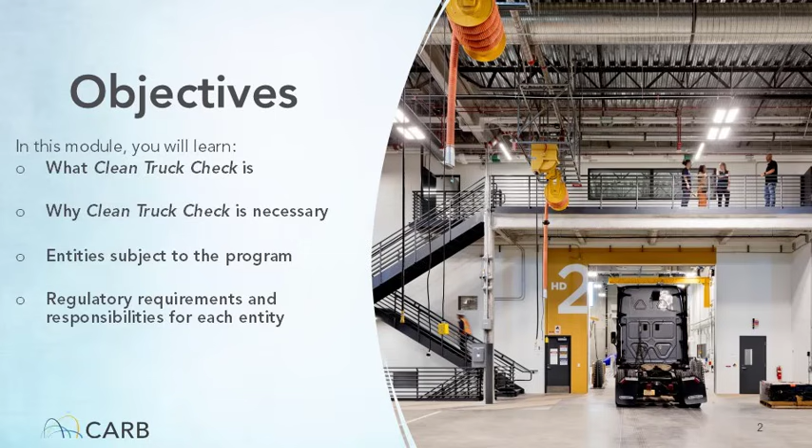Clean Truck Check started in January of 2023. It requires almost all diesel and alternative fuel vehicles with a gross vehicle weight rating of more than 14,000 pounds to pay an annual compliance fee and submit passing emissions compliance tests to legally operate on California's roads and highways. This includes applicable vehicles registered outside of California and outside of the United States.

Clean Truck Check is similar to California's Smog Check program, administered by California's Bureau of Automotive Repair for light-duty passenger vehicles and gasoline heavy-duty vehicles.

Clean Truck Check's emission system inspections and testing ensure that a vehicle's emissions control systems are maintained and functioning. To minimize excess emissions, vehicles with emissions control malfunctions are required to be repaired and submit a passing emissions compliance test by a specified deadline.

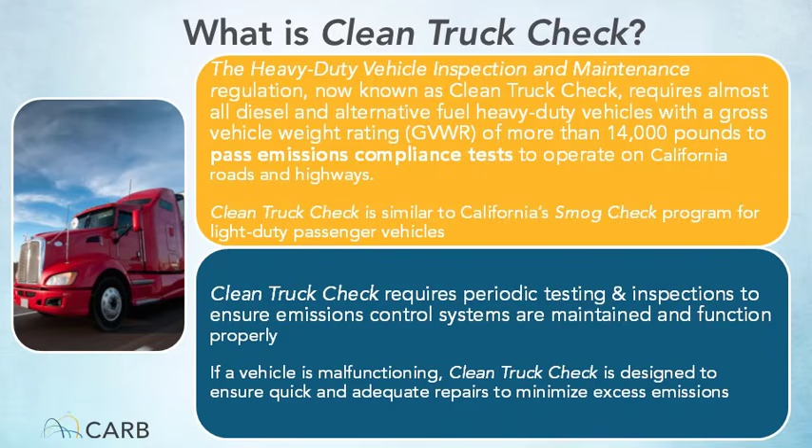Why do we need a Clean Truck Check program? Because heavy-duty diesel vehicles represent over half of the harmful emissions from mobile sources in California. In fact, in 2020, heavy-duty diesel vehicles were responsible for over half of the statewide on-road mobile source emissions of oxides of nitrogen, referred to as NOx, and particulate matter, referred to as PM.

Heavy-duty vehicles with malfunctioning emissions control components can emit substantially higher emissions than properly functioning vehicles. For example, recent test data show that vehicles with damaged diesel particulate filters, called DPFs, can emit PM at levels more than 50 times that of a vehicle with a properly functioning DPF. As we'll discuss later, diesel PM is toxic and harmful to health.

To meet near-term federal health-based air quality standards and reduce health risks for individuals throughout the state, we must act now to reduce emissions from all sources, particularly heavy-duty trucks. Even with all the progress California has made in improving air quality, it still has the worst air quality in the nation, which is responsible for thousands of premature deaths each year.

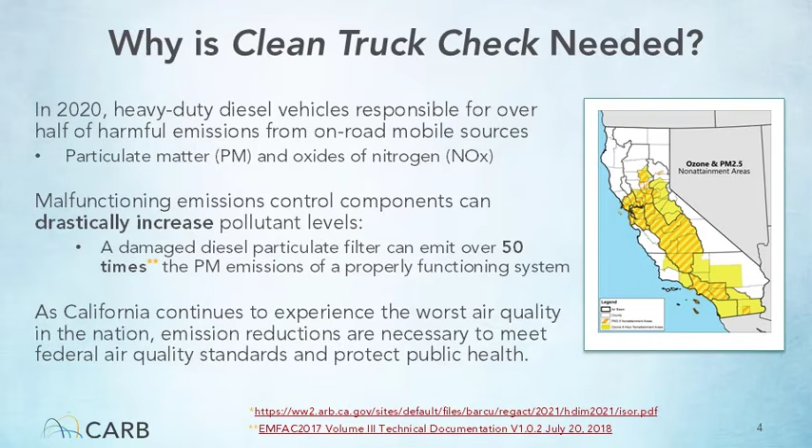As we've mentioned before, NOx is one of the harmful pollutants given off during the operation of heavy-duty combustion vehicles. NOx is a group of highly reactive gases formed during engine combustion at high temperatures and is a critical ingredient in the formation of ground-level ozone.

Once formed, ground-level ozone can lead to many health-related ailments, including respiratory issues such as decreased lung function, increased asthma attacks and allergen responses, and increased hospital and emergency room visits. NOx is also a precursor to secondary particulate matter 2.5 formation and increases the risk for serious health conditions, as we'll present next.

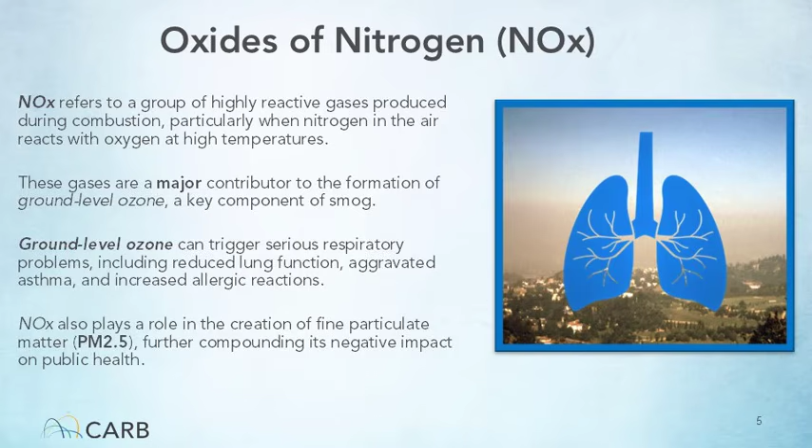Another harmful pollutant released during heavy-duty vehicle operation is diesel particulate matter, or PM. Diesel PM is made up of soot particles from the incomplete combustion of fuel during engine operations. Diesel PM includes a mixture of organic chemicals and metals.

A major component of diesel PM includes smaller particles, which we refer to as PM 2.5. PM 2.5 consists of fine particles with diameters of 2.5 micrometers and smaller, about 1/70th the diameter of a human hair. These tiny particles can move deep into the lungs during breathing and are responsible for serious and sometimes deadly health effects.

Exposure to diesel PM 2.5 can cause an increased risk of cancer, chronic heart disease, asthma, decreased lung function, increased hospitalizations, and premature death. Children, the elderly, and people suffering from chronic illnesses are the most vulnerable to the effects of PM 2.5 exposure.

Exposure studies indicate that about 70% of the cancer risk from airborne toxic contaminants in California is attributable to diesel exhaust. The large health risks associated with NOx and PM requires actions to reduce these pollutant levels during heavy-duty vehicle operation.

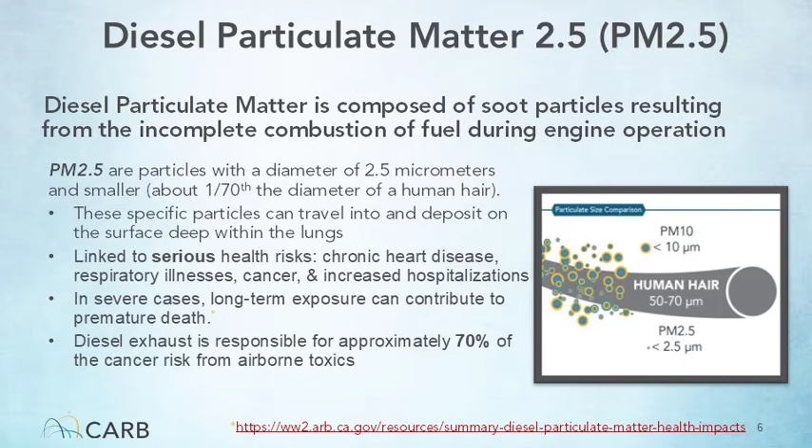With that background on the need for the Clean Truck Check program, we'll now move on to the regulated entities subject to the requirements of the program. The regulated entities include owners and drivers of almost all non-gasoline vehicles with a gross vehicle weight rating over 14,000 pounds that travel in California, and testers that perform clean truck emissions compliance testing on vehicles subject to the program. As a credentialed Clean Truck Check tester, you have a responsibility to accurately perform these tests using specific testing tools and submitting data to CARB in prescribed formats.

The modules in this training course are designed to inform you of your responsibilities as a credentialed Clean Truck Check tester, how to conduct emissions compliance tests, and how to submit test data to CARB.

Freight contractors and brokers that do business in California using vehicles and fleets that are subject to the Clean Truck Check program. Ports and rail yards in California that allow heavy-duty vehicles onto their properties. And finally, vendors of certified OBD testing devices that produce and sell the tools used to perform compliance testing using onboard diagnostics data downloaded from a vehicle's engine.

Moving forward in this training module, we'll now provide further details on the roles and responsibilities of vehicle owners and credentialed testers.

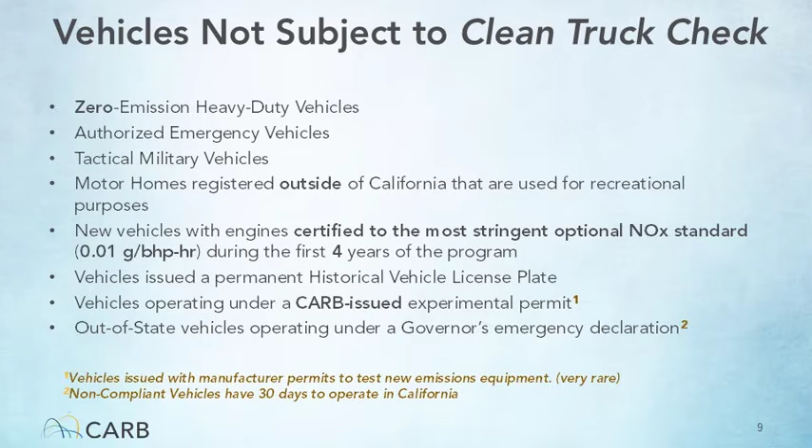In this next section, we will now go over the basic requirements for vehicle owners and drivers, including how these requirements are phased in over the lifetime of Clean Truck Check. In this training module, we will refer to the start date of these responsibilities as implementation phases.

We'll also provide an overview of other vehicle owner responsibilities, which include reporting vehicle and owner information to CARB and paying a per-vehicle compliance fee, and complying with the periodic testing requirements by specific deadlines and understanding the different compliance test methods. And finally, we'll summarize driver responsibilities during a roadside enforcement inspection.

Vehicle owners must ensure all their applicable vehicles operating in California comply if they are subject to Clean Truck Check's requirements. When the program first began in January 2023, remote emissions monitoring devices, or REMD, were deployed throughout California to monitor vehicles' emissions while driving. Vehicles that are detected as possible high emitters may receive a notice to submit to testing, and the vehicle will be required to submit a passing emissions compliance test within 30 days.

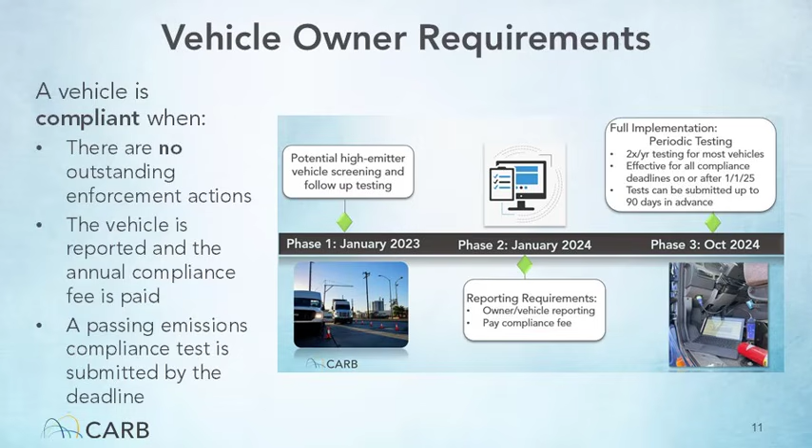Phase 2 requirements, with the initial deadline in January 2024, required vehicle owners to report their vehicles to CARB and pay an annual compliance fee for each vehicle. The third and final phase, beginning in October 2024, launched the periodic emissions compliance testing requirements for all vehicles operating in California. A vehicle is considered compliant with Clean Truck Check if it has been reported, has no outstanding enforcement actions, and is current with both compliance fees and passing emissions compliance test submissions.

What is a remote emissions monitoring device, or REMD? These devices measure NOx and PM exhaust emissions as vehicles pass by the units. Automated license plate readers link the emissions readings to the vehicle as it passes through the unit.

REMD is used to identify potentially high-emitting vehicles for a follow-up emissions compliance test. REMD is a screening tool. It is not a Clean Truck Check compliance test. The owner of a vehicle flagged as a potential high emitter through REMD will receive a notification letter from CARB called a Notice to Submit to Testing, or NST. The NST requires verification that a vehicle is Clean Truck Check compliant by submitting a passing emissions compliance test within 30 days. As a credentialed Clean Truck Check tester, you may be responsible for performing emissions compliance tests and submitting the results to CARB in response to NSTs.

Vehicles that fail a Clean Truck Check compliance test will need to repair any malfunctioning emissions-related control components and be retested to demonstrate Clean Truck Check compliance. If a vehicle owner fails to submit a passing compliance test to CARB within 30 days, CARB may issue the owner a citation and will deem the vehicle non-compliant until the owner takes action to bring it back into compliance by getting the vehicle repaired, if necessary, and submitting a passing compliance test.

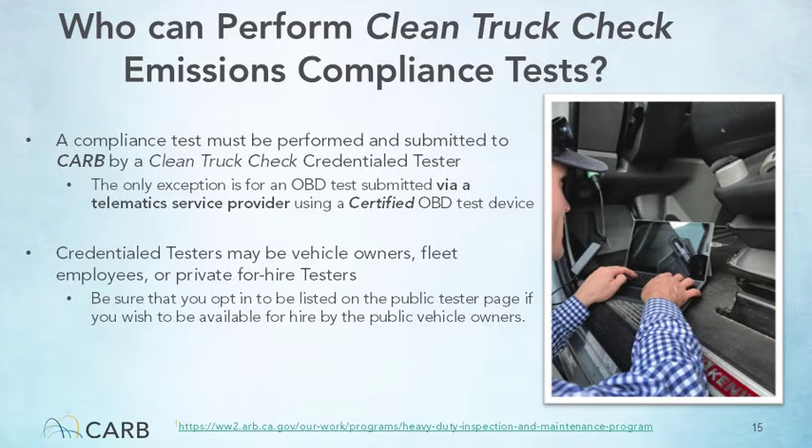Individuals that successfully complete this Clean Truck Check tester training course and pass the exam may become a Clean Truck Check credentialed tester and perform Clean Truck Check emissions compliance tests.

After passing the Clean Truck Tester exam, you will be issued a certificate of completion and a unique tester ID number. You will use the tester ID number every time you perform a Clean Truck Check emissions test and submit test results to CARB. The very last module in this training course will include instructions for accessing and taking the exam and obtaining your certificate of completion and unique tester ID number.

Your Clean Truck Tester credential is valid for 2 years from the date you complete the training and pass the exam. To continue as a Clean Truck Check tester, you will need to pass the exam again before your credential expires. If you don't retake the exam before your credential expires, you will be unable to submit Clean Truck Check emissions compliance tests until you pass the exam again and reinstate your credentials.

Clean Truck Check allows CARB to hold all entities associated with the vehicle undergoing Clean Truck Check compliance testing accountable for ensuring that the tests are properly performed and the data submitted to CARB is accurate. This means that the Clean Truck Check testers themselves, companies or entities that employ their own Clean Truck Check testers for in-house compliance testing, and vehicle owners all have a stake in the compliance testing process.

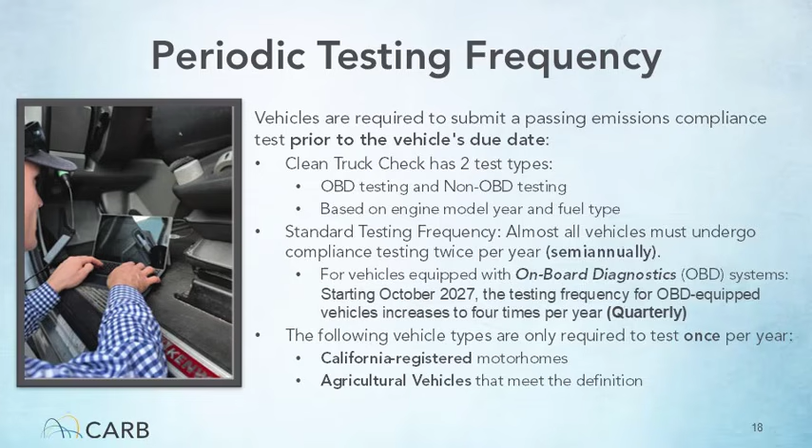Vehicle owners are responsible for ensuring test data demonstrating a vehicle has passed its emissions compliance test is submitted to CARB by the compliance deadline shown in their CTC Viz account. Passing tests may be submitted by the tester up to 90 days prior to the vehicle's compliance deadline to allow time for any necessary repairs. Vehicle owners should always refer to the compliance due dates in their CTC Viz account to ensure they remain in compliance.

We'll now provide an overview of the Clean Truck Check compliance test methods. The test method depends on the model year of a vehicle's engine, the fuel type, and if the vehicle is equipped with a proper OBD system.

For OBD-equipped vehicles, the test method consists of submitting required OBD data to CARB's Clean Truck Check database. We'll highlight options for performing that testing shortly. OBD-equipped diesel vehicles have 2013 and newer model year engines or hybrid systems.

OBD-equipped alternative fuel vehicles have 2018 and newer model year engines or hybrid systems. Non-OBD diesel vehicles with pre-2013 model year engines are subject to the SAE J1667 smoke/opacity test and a vehicle emissions control equipment inspection, referred to as a visual inspection. Non-OBD alternative fuel vehicles with pre-2018 model year engines are only subject to a visual inspection.

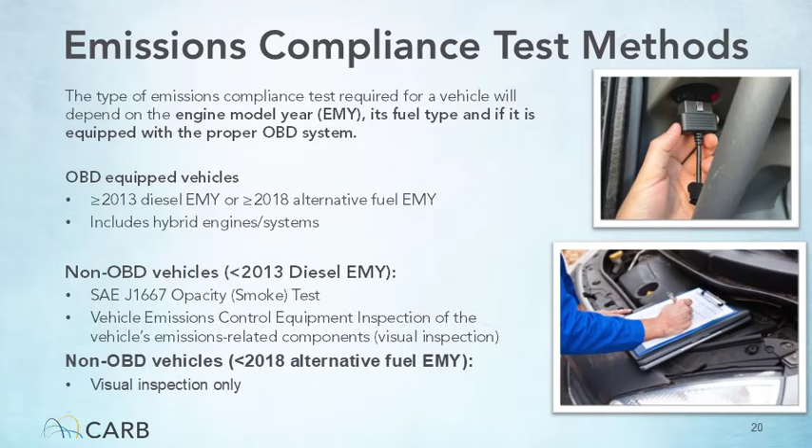All tests must be submitted to cleantruckcheck.arb.ca.gov through either your certified OBD testing device or directly to your CTC Viz tester account for non-OBD tests. Testers should always verify test submissions and results through their CTC Viz account and not the OBD device portal. These test methods are described in more detail in subsequent training modules.

Emissions compliance testing for OBD-equipped vehicles must be performed using a testing device that meets specifications set by CARB, including submission format requirements. OBD testing devices include equipment such as a dongle supplied by a telematics service provider or a handheld scan tool with software that connects to the vehicle's OBD port under the driver's side dashboard.

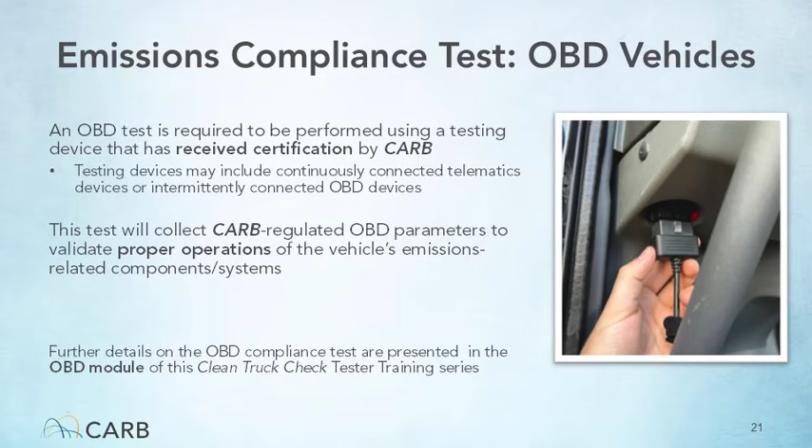Using an OBD testing device, CARB-regulated OBD parameters that validate operation of a vehicle's emission system are collected and submitted to the Clean Truck Check reporting database known as CTC-VIS. A passing emissions compliance test indicates there are no emissions-related component issues. The OBD module of this tester training series provides more detail on the OBD compliance test method and available testing options.

In case questions arise during the inspection process, we will now present a brief overview of requirements for OBD device vendors to ensure you have basic knowledge of their responsibilities under Clean Truck Check.

OBD device vendors actively work with CARB to test and verify that their devices meet CARB's technical specifications and OBD data formatting and submission requirements before they are eligible for sale and use in Clean Truck Check compliance testing. Only OBD devices that have successfully demonstrated they can meet CARB's requirements can be used during vehicle compliance testing. Devices that do not meet CARB's requirements are ineligible to be used for Clean Truck Check compliance testing and will result in a failed OBD compliance test.

This means that each testing device used by a credentialed Clean Truck Check tester has been vetted through CARB to meet our requirements and will not harm the vehicle being tested.

To find a list of certified OBD testing devices and device vendor information, please access CARB's main Clean Truck Check webpage and click on Credentialed Testers and Testing Devices. Then, click on OBD Test Devices. As more vendors complete the certification process, the list will be updated to let the public know which OBD testing devices meet CARB's requirements. For non-OBD vehicles, SAE J1667 compliant smoke meters are used to perform emissions compliance testing.

Non-OBD vehicles must also undergo a vehicle emissions control equipment inspection or visual inspection. This inspection consists of a visual inspection of all required emissions control components on the vehicle to ensure they are in their proper configuration and have not been tampered with.

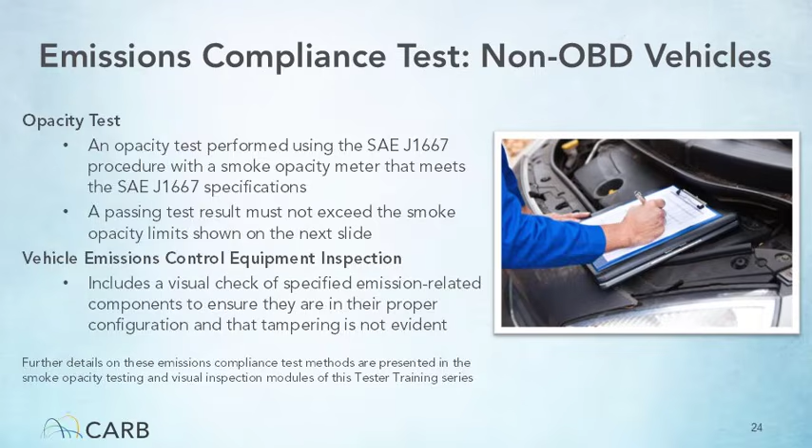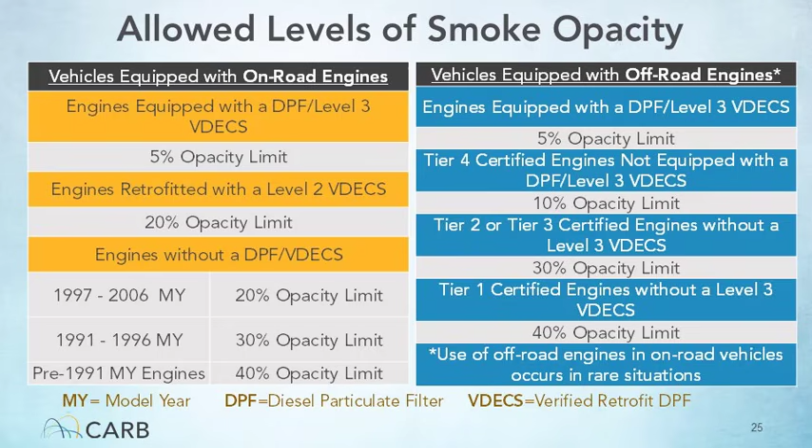The allowable smoke opacity levels for on-road engines range from 5% for engines with DPFs to 40% for old pre-1991 model year engines. The new opacity limits include a 5% threshold for off-road engines with diesel particulate filters and also delineate opacity limits based on engine tier and exhaust emission control technology, ranging from 10% to 40%.

All testers must have an active tester account at cleantruckcheck.arb.ca.gov. The email address used to create the account must match the one used to pass the tester exam, as well as your certified OBD testing device login email. If these do not match, your test submissions will be marked invalid tester. CARB has provided step-by-step instructions at this video link.

As a credentialed Clean Truck Check tester, it is your responsibility to perform all emissions compliance tests as specified in the Heavy Duty Vehicle Inspection and Maintenance Regulation, and as described in this course. Failure to follow the test procedures and Clean Truck Check requirements may incur a revocation of your Clean Truck Check tester credential. OBD emissions compliance test submissions will automatically upload to CTC-VIS when properly performed using a CARB-certified OBD testing device. The OBD testing training module provides details on this process.

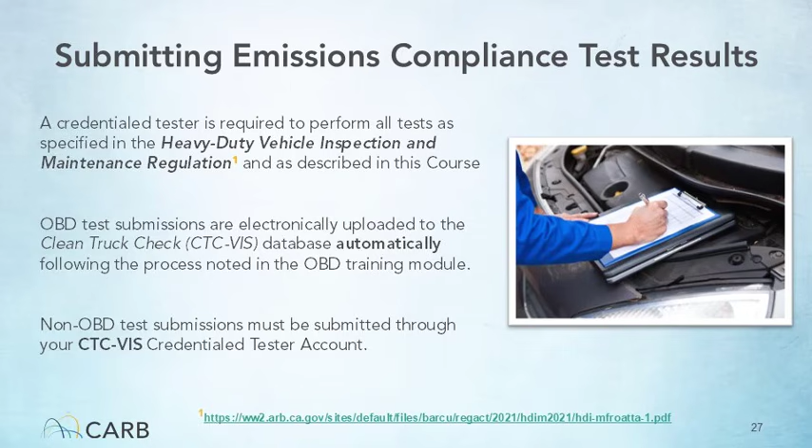Non-OBD compliance test submissions must be submitted to CTC-VIS through your tester account using the process described in the smoke opacity testing and vehicle emissions control equipment inspection training modules.

We have reached the end of the Basic Regulatory Requirements module. We hope you now know more about Clean Truck Check and why it's needed in California, what entities are subject to Clean Truck Check, and the basic requirements for each of these entities. You are now ready to move on to the next training module.